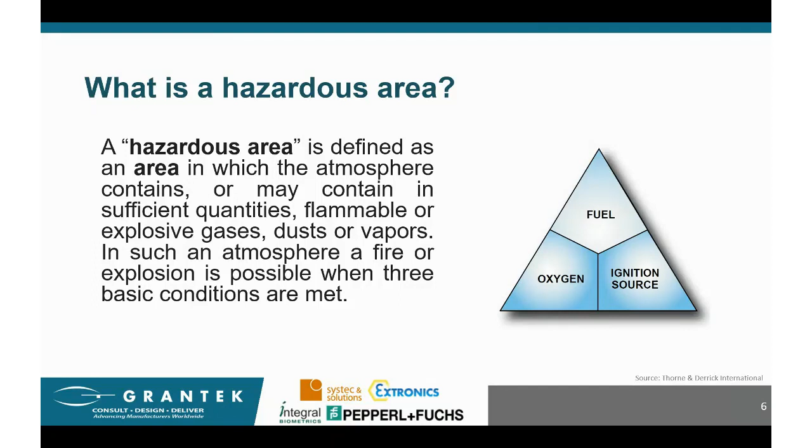Erik, I think you may be experiencing maybe the same issues that I was. There we go. Justin, I'm not sure if it's...

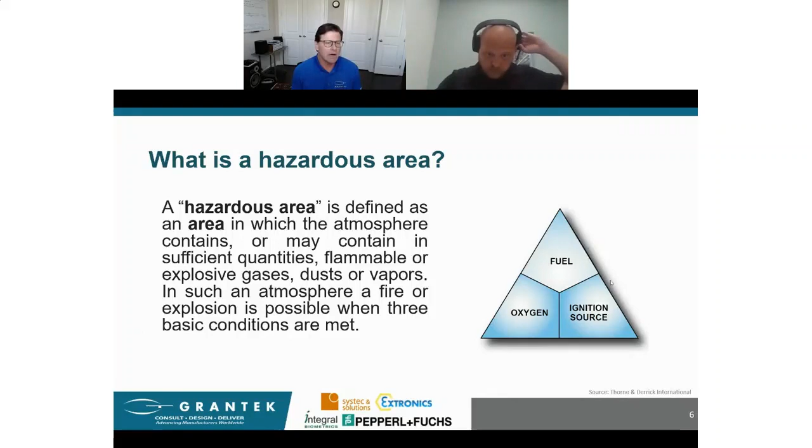Hey everybody, this is Erik Hasty. It's great to be here. Good afternoon for joining our webinar. I'm going to basically talk about a few things with regard to what is a hazardous area. We're going to talk about some systec & solutions actual hardware. First slide though, what is a hazardous area?

It's basically defined as an area which atmosphere contains or may contain in sufficient or insufficient quantities flammable or explosive gases, dust, or vapors. In such an atmosphere, a fire or explosion is possible when those three basic conditions on the right are met. It's really referred to as the combustible triangle. Again, this is just basic background knowledge for everyone's information.

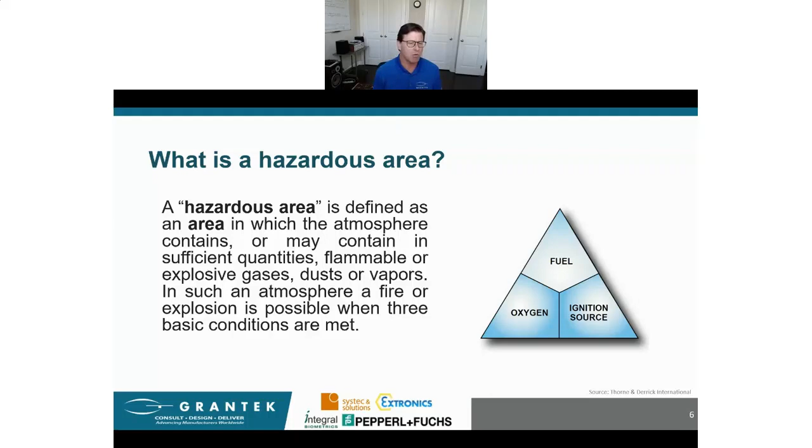These are some hazardous environment zones: zone 0, zone 1, and zone 2. In North America, hazardous locations have traditionally been defined by a combination of classes and divisions. Zone 0 is an area in which an explosive gas atmosphere is present continuously or for long periods, essentially. Zone 1 is an area in which an explosive gas atmosphere is likely to occur in normal operations. And Zone 2 is an area in which explosive gas atmosphere is not likely to occur in normal operation, and if it does occur, will only exist for a very short time. So that's really the zones, how they're classified.

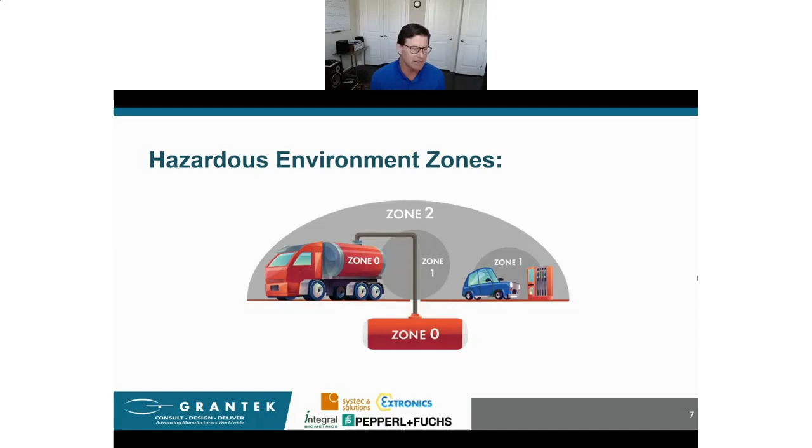This is a very simplistic slide. I wanted to keep it very simple, and I think this slide does a pretty good job of doing that.

This is actually our HMI for hazardous areas, the Visunet. The beauty of this is its modular design, which I'm going to get into shortly. A few things about the Visunet itself: it comes in two sizes, a 19-inch and a 21.5-inch full HD display. There's the option to have a projective capacitive touch, multi-touch display as well. One thing I want to touch on too is it's modular - it's a field maintainable design, and basically that means you have 3 separate units inside this one shell that are easily maintainable.

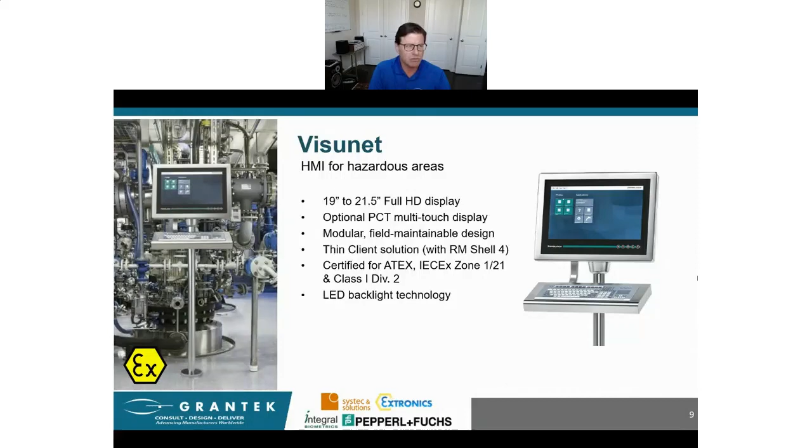Want to talk real quickly about the Visunet, some of the technical features here. As I said, it's a very modular design. There's basically 3 modules within this internally: the display unit, which consists of the display, the touchscreen, and a hardened front glass smooth cover; the power supply unit, which is backpacked essentially, so it's panel mount or standalone, which would be in the system enclosure itself, as this is showing you; and the CPU unit, the processor, the SSD, the RAM, the memory, EX circuits, the interface modules all enclosed in that one CPU unit. And as I said, one of the key advantages of the Visunet is its modular design.

And due to being modular, you can quickly replace components. You can independently, in the event of a fault, make field maintenance easy, and it really reduces costs with downtime as well. Again, no gaps, all smooth where liquid or dirt can accumulate, and very easy to clean and wipe down. Next slide.

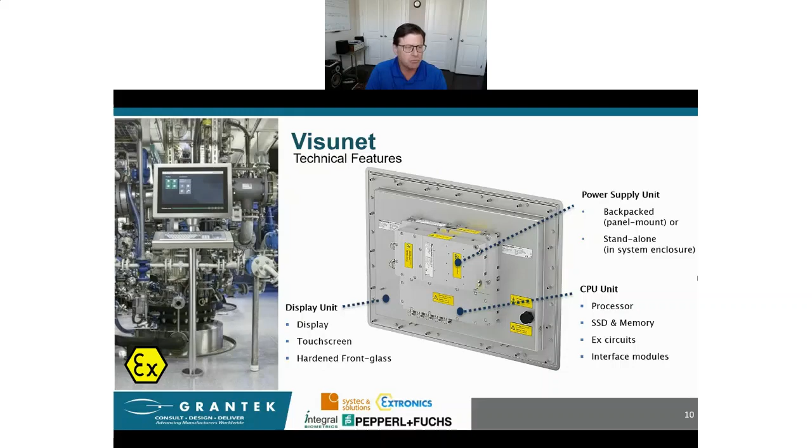Kind of talked about this, but some of the key features and benefits of the Visunet. It is a full HD Zone 1/21 multi-touch panel. The glass on the front is seamless, so again, you don't have gaps. There's no grooves on it. It's a seamless glass front for best cleanability, increased robustness of the touchscreen, and it really supports modern multi-touch user interfaces that you're going to be using with this unit.

As far as the actual weight, it is a lightweight, compact design, about 23 or 24 kilograms. Easy handling during installation, cost-effective mounting options as well, which we're going to get into shortly, and again the modular design system, which is really field maintainable by the customer. The state-of-the-art RM Shell 4.1 is a thin client, and the EXTA2 keyboard variants for the GxP system as well.

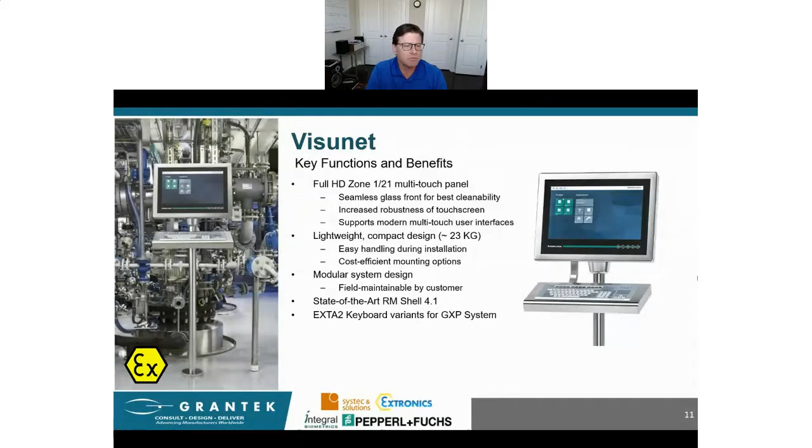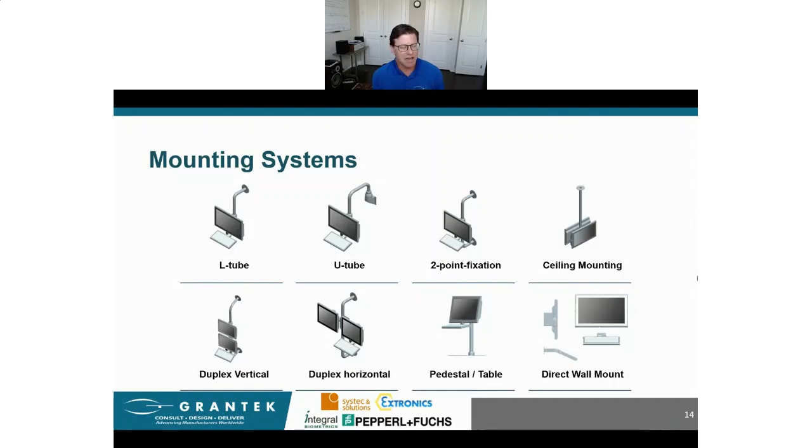Some of the duplex options on the bottom left and second from the left there, as you can see. We do offer a pedestal table mount. I think we kind of basically saw a picture of the pedestal without the actual tube on the previous slide. And then we offer a direct wall mount, which is exactly that. It mounts directly to the wall, and the keyboard would go into the wall as well. So again, I want to emphasize there's a lot of options with systec & solutions that we can offer you.

If you're going to be typing for long periods of time, I would recommend probably the glass keyboard, but it's really a matter of feel, and that's the beauty. We offer both of these for customers that prefer one over the other. We have a scanner box where it holds scanners into cradles, and then we offer printer boxes as well. Again, IP65 rated — all of this is IP65 rated, so it's wash down ready.

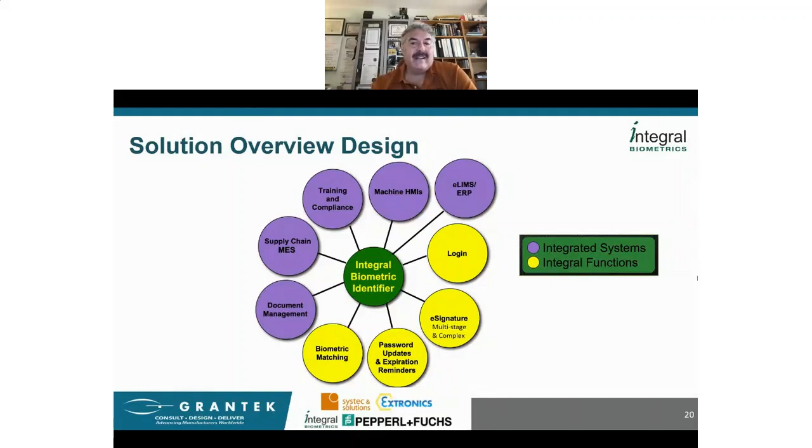Integral has been working for 18 years to build automation integrations with leading suppliers of manufacturing automation systems. Werum PAS-X, SAP, Rockwell Pharma Suite, Siemens Camstar, JDE, and Wonderware are some products you may recognize and be using in your facilities, and we have integrated these applications. We also take our learnings as we integrate each new technology and codify these methods into a collection of toolkits and navigators designed to deliver rapid integrations. By rapid, I'm talking about 1 to 3 days of work for most integrations, not including testing and validation, as we all know.

Our platform primarily supports systems running in Windows environments and can support Windows native applications, web browser applications, Electron apps, Java apps, and web service enabled apps, to name a few. We support systems with and without Active Directory support, and currently support environments such as J&J's global network, which also includes multiple Active Directory domains.

Our company focuses on quality, compliance, and reliability. As the front door to critical factory workflows, we make sure we regularly oil the hinges and test for squeaks.

We also deploy our metrics tool to all sites to monitor and report on key performance indicators, to proactively identify and pinpoint system issues and enable rapid response to potential issues. Our goal is to try to catch the issue before the floor notices it.

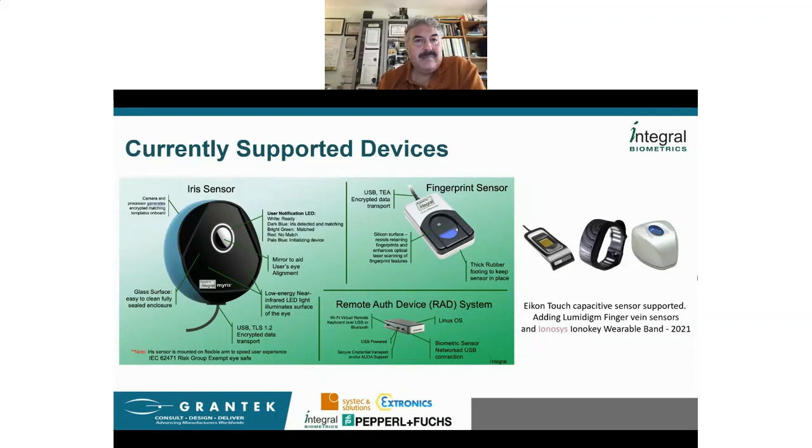This video will show a little demo of using our iris sensor to authenticate.

It's really that easy. This video was filmed at Werum's headquarters while we were working to integrate their PAS-X product. As you can see, it's pretty quick and easy to work with.

You also might notice that there's a mount. The mount actually reduces time in the user's work, so they don't have to lift the device and position it in front of them. We're always looking for ways to optimize.

The Ionosys Ionokey, which is a recent addition to our environment, offers a wearable that can be worn under a gown and is activated via palm vein biometric match to a matching template that's stored directly on the band. Once a worker matches and activates the device, it is then enabled for authentication with our platform.

The Ionosys Ionokey stays activated until it's removed from the wearer. It monitors this connection with multiple sensors, including a magnetic clasp, galvanic skin detection, and heartbeat liveness detection.

The device also stores the user's biometric matching template directly on it, so once provisioned, it can only be used by the assigned user.

For ATEX environments, there are no iris sensors on the market that are designed explicitly for ATEX or clean room environments. Enclosures and mounts must be used to make them safe.

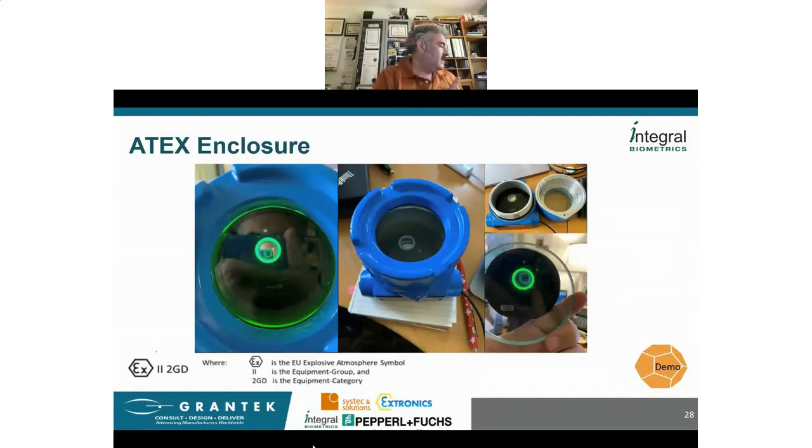In addition to testing with enclosures, we've tested with a diverse population of users and protective gear and multiple layers. Our customers have been kind enough to send us the different gloves, goggles, and gowns that they use so we could test with them. We also test with a diverse population of users with different backgrounds, ethnicities, and colors.

These have been very successful in matching with all sorts of gear, even multiple layers of eye and face protection. We've actually tested with 3 separate layers of protection on the person, two different goggles and a hood, plus also a barrier such as the lime glass and/or plexi between the sensor and the user. And this all has worked.

Now, on some subjects, we don't have such luck. We've discovered that dogs apparently don't work well with iris sensors.

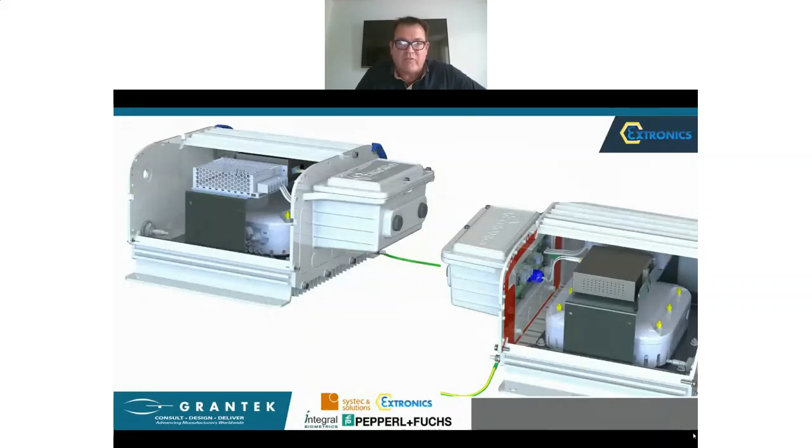So if we move to the next slide, we'll move on to good old Div1. Div1 in the US covers the zones in the previous presentation, Zone 0 and Zone 1. So Class 1 Div1 covers both those areas. It's the most difficult area to get equipment in, and there's limited protection methods. The most famous and the one used most commonly in North America is EXD, or flame-proof enclosure system.

Explosion-proof boxes - these are basically an enclosure that's breathable. It's not airtight, the gas can go in if there's a gas present. If the radio inside it fails, ignites, gets hot, ignites the gas, and there's an explosion inside, the enclosure contains the explosion, doesn't let the flames come out to ignite the gas around it. So that's where that expression comes from.

And if you saw that little enclosure that the integral biometrics showed you, that's actually a flame-proof enclosure. The flame path - you're wondering why there's a massive thread - that's a flame path. The gas, the flame can't get out. By the time it gets out, it's cooled and can't ignite the gas around.

So just like the Div2 solution, we can put pretty much any radio inside. You've got intrinsically safe output, so you've got flexibility with the antennas. Again, there's some Aruba radios. So taking your indoor stuff, your carpeted office safe area equipment, into the hazardous area using this Div1 solution.

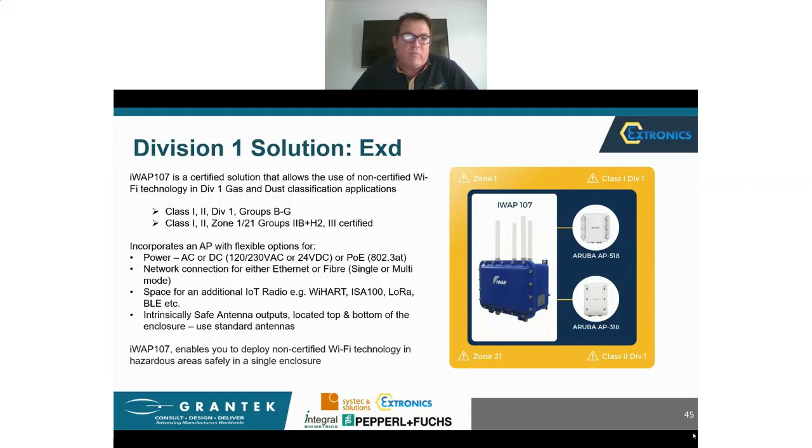And here we've got flexibility, just like the Div2 solution, to put radios into Div1, plus their power supplies, media converters, PoE injectors. Some radios have to have their own PoE injector. So that's really what we do.

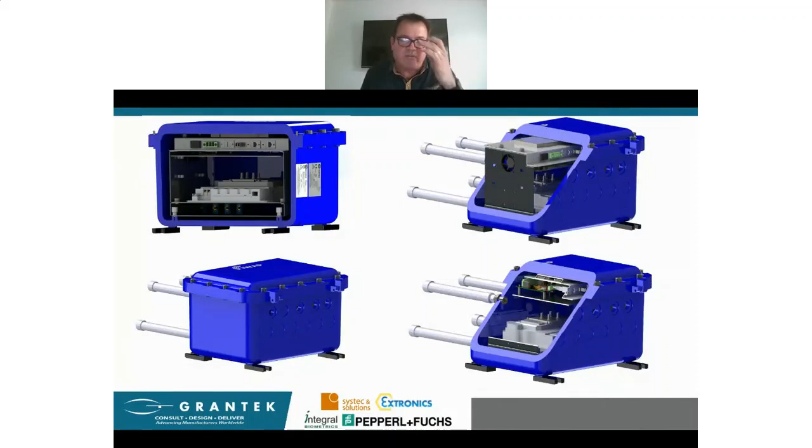So it's a very focused and niche presentation, just so the takeaway is: if you want to put a radio into the hazardous area, there are quite a lot of laws around the RF output, its electrical safety. You can't just slap it in an NEMA 4X box and put it in a Div2 as is quite common. That's not to code. Using one of these enclosure systems would bring anything you put in there - even a little BLE or LoRa gateway, BLE gateway, standard kit - to code, and we can do that work for you.

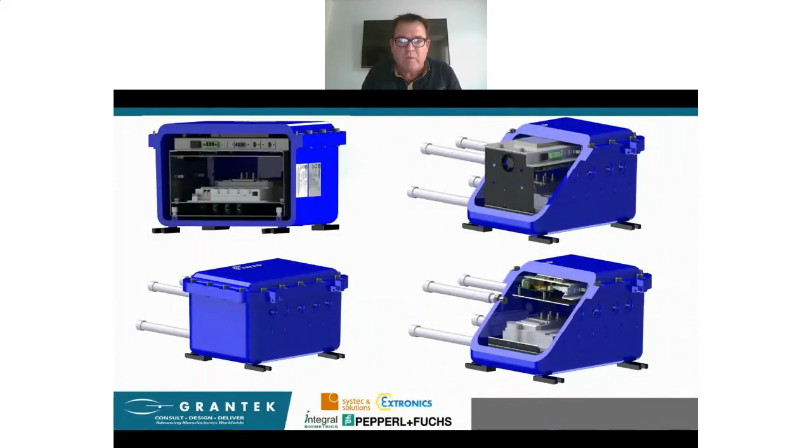Yeah, thanks, Chris. I'm just going to stop sharing my screen really quickly. I'm going to jump back to Justin's slides. So Justin, if you want to try to jump back in again, that would be great. I think you should be good to go now. And I'll just reopen this slide deck for everybody. Awesome, okay, I can see you now, Justin. Let me just share my... okay, I think you can see me now, but I don't have audio now. We can see you, and audio is perfect. Wonderful, I think everybody can see my screen again. Off you go. Okay, I don't have audio on my end, but Emily, can you hear me? We can hear you, yes. We can hear you, okay great. We'll just go on from there. Sorry about that, sorry everyone for all the technical issues. You know how it goes this day and age.

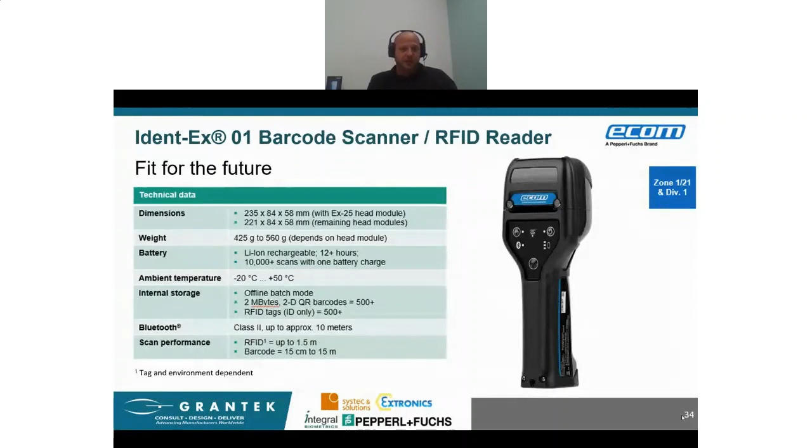Oh, I think you lost me. We did just. Can you hear me now? You're back. Okay, sorry, my connection dropped for one quick second.

So we've got LF RFID, low frequency, high frequency RFID, ultra high frequency RFID, and of course 1D barcode and 2D barcode. We do have some combination modules, depending on if you need to do RFID and barcode, but we can't do a combination with the 2D and the UHF - it's just too much space for what we call the head unit there.

One thing on the different reader heads, as we like to call them - those can be changed out, but it needs to be done in one of our service centers. So it's not something an end user or anybody outside of a P&F service center could just remove that head and change it out. It's a really simple process - there's some reconfiguration that needs to take place, and just due to the certification, it does need to come in.

But we have had customers that were using barcode and went to RFID, or the other way around. They'll send that in, basically buy the new scan head, and we can change those out and switch what technology you're using with this particular scanner.